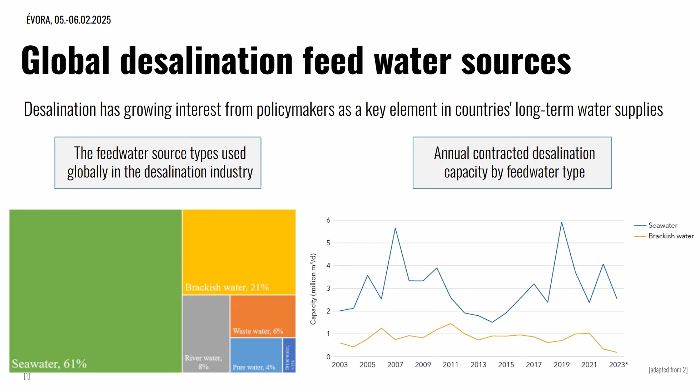So on the left side you have seawater, and for brackish water, you can see from 2003 until 2023 how the contracted capacity evolved regarding the feed water type. We can see that seawater is the mainly used feed for desalination.

I have a brief note that regarding Europe, 88.5% of the technology used nowadays is reverse osmosis. And as I said previously, MENA region countries—countries in North Africa and the Middle East—use mostly 31% multi-stage flash technology, and 9% multi-effect distillation technology.

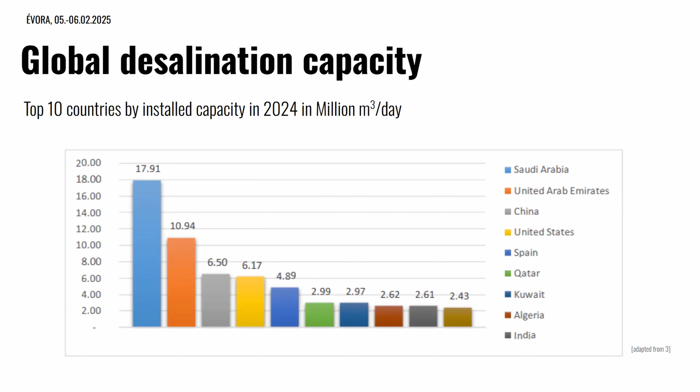It's important that there exist 2,336 desalination plants installed in Europe, but only 1,779 are active facilities nowadays, using seawater and brackish water. They can supply 7.92 million cubic meters per day.

And this is how the water produced by desalination is usually distributed - for most of them, it's public water supply, industrial applications, power plants, and irrigation.

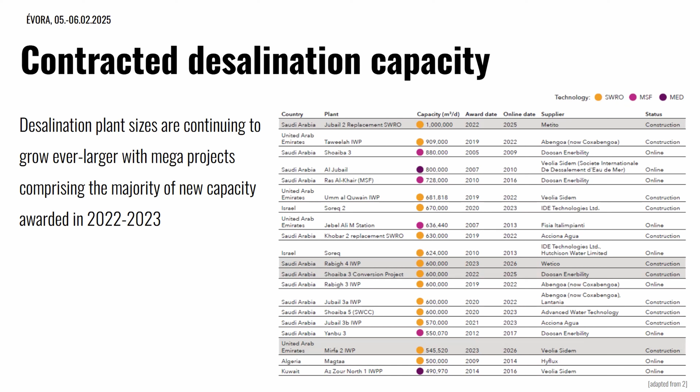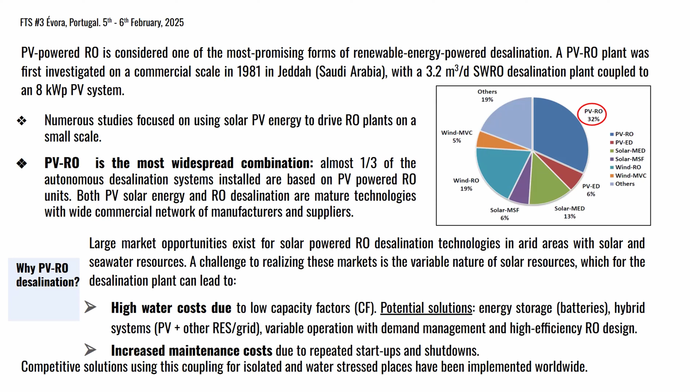Now we will see the KPIs. PV benchmarking refers mainly to the process of evaluating and comparing the performance, efficiency and effectiveness of PV desalination systems. This will involve assessing the key performance indicators, such as there are many, but the main ones are the water recovery rate, specific energy consumption, the CAPEX, OPEX, and the levelized cost of water, comparing them across different system designs, manufacturers, and operational conditions.

Which is the purpose, the main purpose of doing this benchmarking? Well, we can find just to identify the best performing technologies for different feed water scenarios and operation conditions. Also to optimize system designs for energy savings and cost reductions. Why not to compare performance across different climatic conditions around the world? And of course, to guide investment decisions in sustainable desalination projects.

The benchmarking approach we have done is mainly based on comparative analysis. The first way to do it is to compare different systems based on performance of these KPIs. And the second way we will see different charts is by comparing case studies of existing desalination systems.

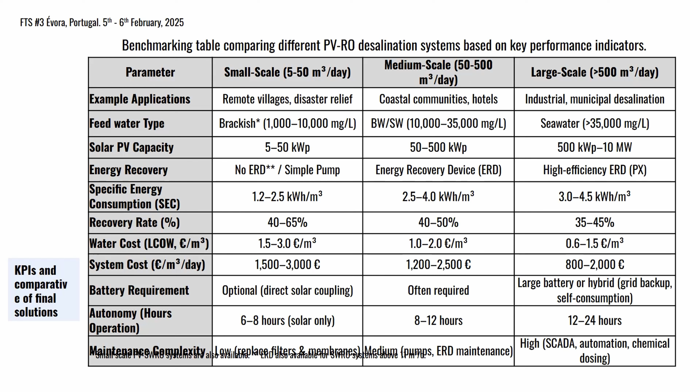And the maintenance complexity, we find low in the small capacity production plants, medium and high in the largest capacity. The second way of comparing different systems is by using existing case studies and comparing them.

We have here 4 different systems. The first one will be deeply explained by Tommy Laninsalo, he's the chief engineer of Solar-Water Solutions who will give us a talk later on. It's a small-scale off-grid system installed in Kenya, Kitui, with just 3 cubic meters per day production capacity.

The second one is a grid-connected system installed in Abu Dhabi. There's a curious system, floating PV RO in Singapore, and the large scale in Saudi Arabia, in Neom.

And the system type: the first case study is off-grid and modular design. The case in Abu Dhabi is a grid backup hybrid system. The one in Singapore is floating PV RO, and the large system is fixed in Saudi Arabia.

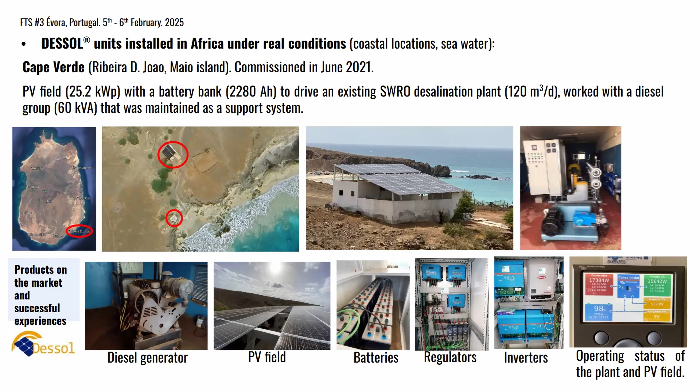This is a seawater reverse osmosis desalination system. What we did is install a PV field and a battery bank as a backup system to an existing seawater reverse osmosis desalination plant that at that moment was fed by a diesel generator, maintained in case of emergency. We just made a retrofit of the plant. It passed from 100 cubic meters per day of production capacity to 120 cubic meters per day.

Well, this is the first of the companies that will present today the system. I will not go in much detail because we'll have a later presentation on that. Just to say it's a company, Solar-Water Solutions, based in Finland. They have an innovative approach that enables the direct connection of solar without the need of batteries, inverters, and so on. Here we have the system we saw, the case study in Italy, in Kenya, and this is for brackish water desalination.

The second company is a French company called Osmosun. The technology could be installed fully off grid or connected to the grid. The production capacities go from the range of 1 cubic meter per day to 2,000 in the case of seawater desalination, and from 5 to 2,000 in the case of brackish water.

Here you have the successful experiences of this system. More than 40 Osmosun systems operating in 20 countries. You can find them in French Polynesia, Cape Verde, Mauritius, South Africa, Mozambique, Namibia, and Vanuatu. They are for both sea and brackish water desalination, with different production capacities, and beneficiaries of those systems.

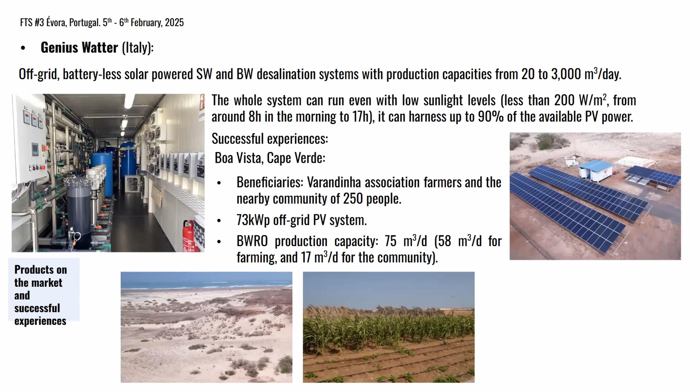The successful experience, just to highlight one of them, is the system they installed in Boa Vista, Cape Verde. It is a brackish water desalination system with 75 cubic meters per day of desalination capacity.

Now we are going to focus on the challenges and the future opportunities we can find for PVRO desalination. I have divided those challenges into 2 groups: the technical challenges and the economical challenges. I have highlighted 6 for each group.

The first one we find is the variable solar energy supply. The solar irradiance fluctuations lead to unstable power supply to the RO operation, and energy storage by batteries or hybrid systems are often necessary, but this adds complexity and cost to the system.

The second technical challenge will be the energy storage limitation. Of course, batteries increase the system's reliability, but have limited lifespans and require replacements. High cost, low energy efficiency, and degradation make battery integration a challenge within the system.

RO systems' efficiency and energy demand—of course, RO is an energy intensive process.

We need energy recovery devices in order to lower that specific energy consumption, and optimizing the energy use while ensuring consistent water production is the major challenging design.

The membrane fouling and maintenance during the operation of PVRO desalination systems can lead to shutdowns and startups of the plant more frequently than in normal operation, which can lead to frequent cleaning, increased operational downtime, and maintenance costs.

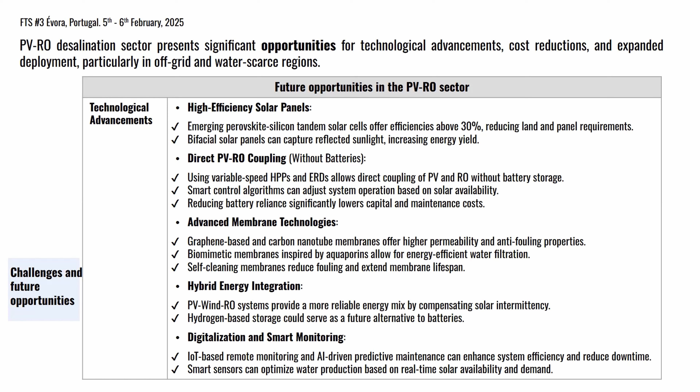More future opportunities, in this case, based on the economic and market expansion and the declining cost of PV and RO components. We find that solar PV module costs continue to decline, making PV more cost competitive. Mass production of high-pressure pumps and RO devices will further reduce system costs.

On the side of modular and decentralized systems, we find containerized PVRO solutions provide plug-and-play options for remote communities. The scalable microgrid integrated RO plants can serve both households and industries.

This is very important: green financing and carbon credits. Growing emphasis on decarbonization and net zero goals creates funding opportunities for PVRO projects. Carbon credits and water credits could provide additional revenue streams, and public-private partnerships can enhance affordability and accessibility for these kinds of systems.

And finally, the water-energy-food nexus. PVRO desalination for agriculture can support food production in arid regions. Solar-powered greenhouses using desalinated water can boost crop yields, and integrated aquaponics and desalination could be a sustainable food production model for many areas.

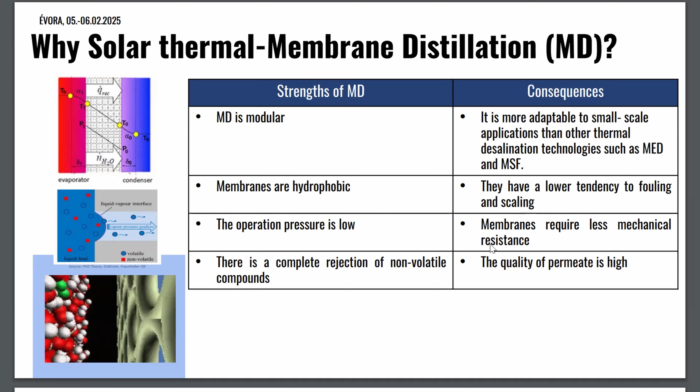All of these characteristics make it very attractive to some specific applications that I will explain later. Now I will move into the key performance indicators.

I'm going to focus on the energy efficiency at pilot scale and the evolution of this parameter throughout the years as membrane distillation became more attractive.

The first thing introduced in the design of membrane distillation technology to decrease the specific thermal energy consumption and improve energy efficiency was the shift from the plate and frame design to the spiral wound design, in order to introduce internal heat recovery in this technology.

However, when internal heat recovery was introduced with the spiral wound design, this value reduced to more acceptable values, that is 256 kilowatt-hours per cubic meter. So only the change of design from plate and frame to spiral wound, for internal heat recovery, decreased the specific thermal energy consumption by a high percentage.

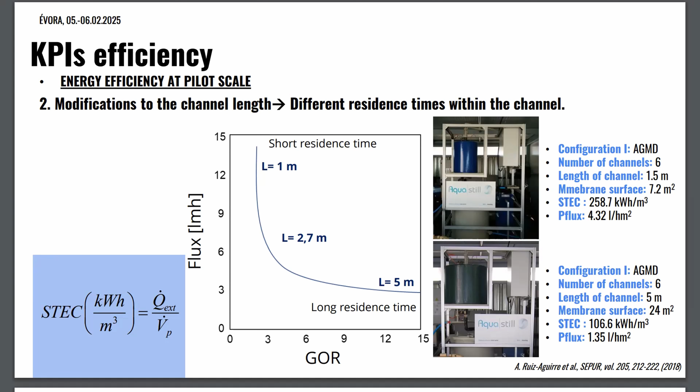Here we can see two different MD modules from the same company, Aquastill, that are totally the same, the only difference being the length of the channel: here 1.5 meters, and here 5 meters. We can see that the specific thermal energy consumption reduced by half in the case of the longest channel length.

The other modification in the design was to introduce the multi-envelope configuration in the channel. The difference is that each channel in the MD module, the permeate channel, the cooling channel, and the feed channel, is formed by several envelopes. This increases production inside the MD module as the number of envelopes increases.

The last improvement to increase energy efficiency in MD at pilot scale was the extraction of air and non-condensed gases in the permeate channel, the air gap channel. This reduced the resistance to mass transfer, for the same heat power. So when we introduce this configuration, the vacuum air gap membrane distillation, the specific thermal energy consumption was reduced.

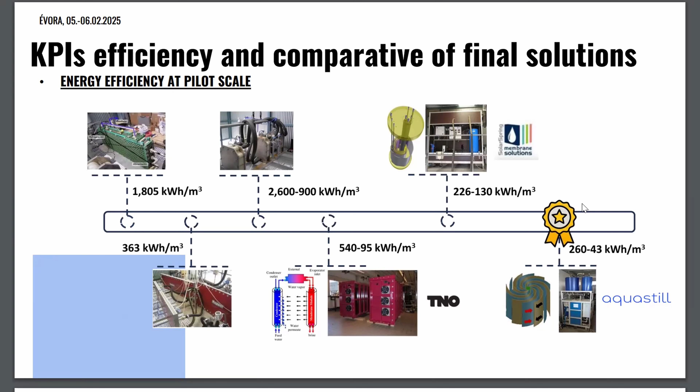This is the product currently on the market, from the Aquastill company, which incorporates different improvements to reduce the specific thermal energy consumption, with also a very acceptable production of permeate with high quality.

And now we move on to the successful experience in the field of membrane distillation systems, first of all at the Plataforma Solar de Almería.

We have already operated and characterized several different MD modules. We currently operate and characterize most of the MD modules existing in the market, and we operate at the Plataforma under an environment very relevant compared to the solar field.

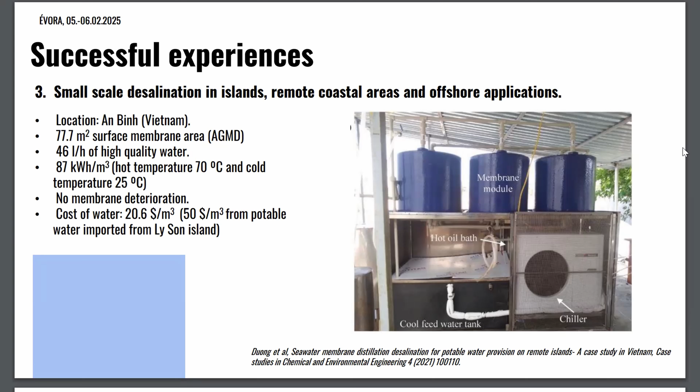Another successful experience, though not for producing high quality water, was the demo developed under the Reversen project. In this application, membrane distillation was coupled with reactive precipitation and diffusion dialysis to regenerate a copper electroplating bath. In the reactive precipitation, copper was obtained that is currently sold at half the cost of fresh raw copper material.

Now we move on to the challenges. I divided the challenges into three categories: energy efficiency, permeate production, and finally the quality of the permeate.

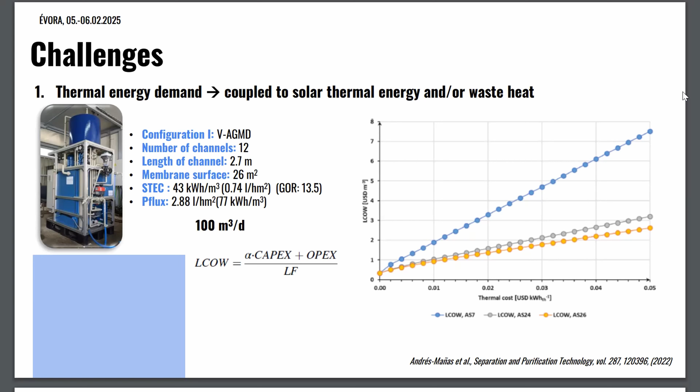Here I show an example of work where we calculated the levelized cost of water for a specific application producing fresh water, with a total production of 100 cubic meters per day. We obtained the levelized cost of water depending on the thermal energy cost. The orange line relates to this model, and we can see that if we increase the thermal energy cost, the levelized cost of water increases. Considering a solar thermal energy cost of 0.036 euro per kilowatt-hour and an electric energy cost of 0.07 euro per kilowatt-hour, the levelized cost of water was 1.79 euro per cubic meter, which is acceptable considering a production of 100 cubic meters per day in a small scale application.

Now, considering the challenge of increasing the permeate production, we can consider two different approaches. One is the use of the multi-envelope design I already discussed previously, which produces higher permeate considering the multi-envelope internal design of the module. The other approach is to use another configuration, the vacuum multi-effect installation, which consists of using several effects in the module to recover the latent heat of condensation from the previous step.

To be honest, this configuration reduces the specific thermal energy consumption, but not as much as in the case of the Aquastill installation. But the most important advantage of this configuration is that the recovery ratio is very, very high. Considering the usual recovery ratio of 10% for this technology in a single pass, we obtain recovery ratios higher than 50%, whereas usually the recovery ratio obtained with this technology is below 10%.

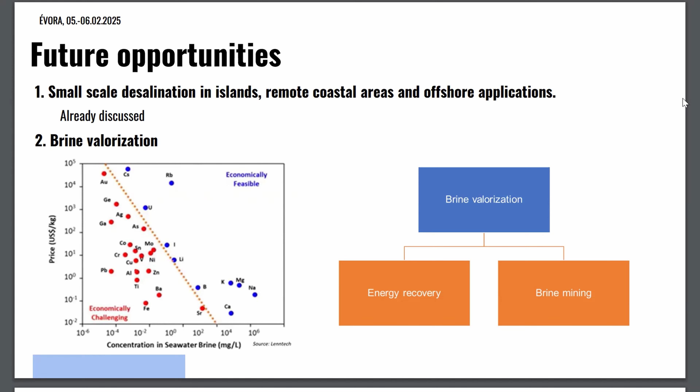Later I'm going to explain two different projects. One focused on brine mining, but the other focused on the production of energy from the brine.

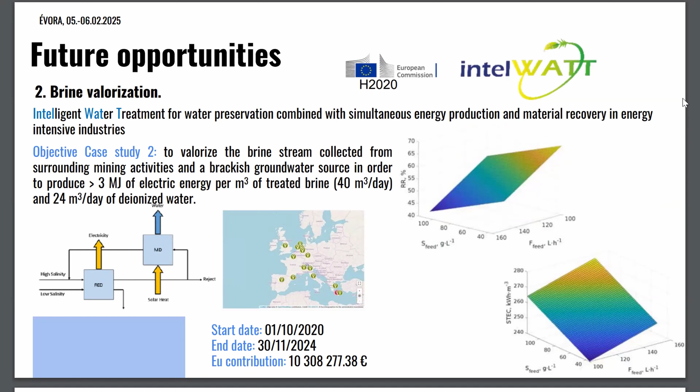Here we can see the European project intelWATT, focused on the production of energy. The membrane distillation was coupled with reverse electrodialysis in order to regenerate the high salinity stream with membrane distillation, to reuse it in the reverse electrodialysis considering the salinity gradient in order to produce electricity. Here we can see the results obtained with the high salinity, and we obtain a high recovery ratio with this module, and the specific thermal energy consumption is between 260 and 270 kilowatt-hours per cubic meter.

And finally, the last application for membrane distillation is to produce high quality water for green hydrogen production. In green hydrogen production, the technology considered is electrolysis. The water is split by electrolysis, and this process consumes a high amount of fresh water, not only for production but also for cooling, because the efficiency of the electrolysis is not 100%, it's between 60 and 70%, which means part of the electricity is transferred into heat, and it's necessary to cool down the water to continue the electrolysis process.

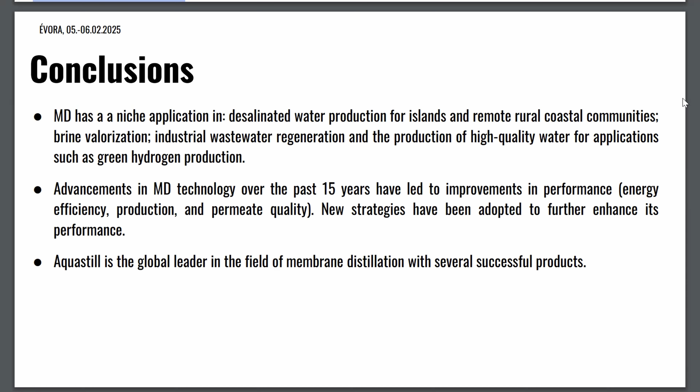Thank you for the presentation. And you mentioned the problem of salt passage with thick brines, right? Yes. But I'm not so concerned about it in the case of circular economy lines, because I think you can recirculate it back into the feed of the RO system. So can you give us an idea of the salinity you can get in the permeate stream, the condensate stream, when you treat brines?

Yes, depending on the salinity of the feed. But when we increase the salinity of the feed higher than 70 grams per liter, the conductivity of the permeate can be between 100 and 300 microsiemens per centimeter. Yes, but considering MD, in general you can produce a very high quality permeate, because for seawater the conductivity is 1 or 2 microsiemens per centimeter, which is very low. Yes, yes.

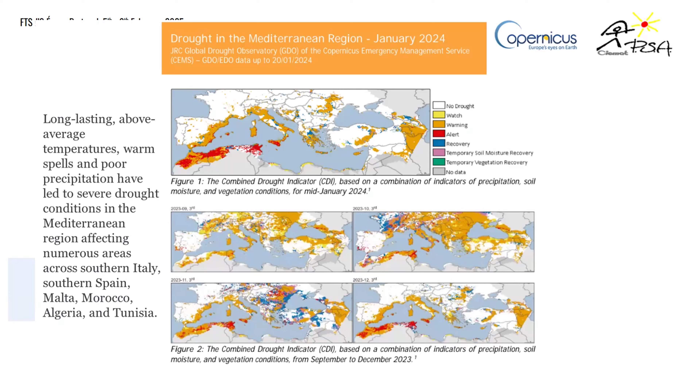I'm not going to be long on this, but I would like to put you in context: we are in a severe drought in the south of Europe, in the Mediterranean countries, so we all know we need alternative sources of water. Water reuse is already accepted as another alternative water resource, always in combination with desalinated water. So we need to think about the effluent of municipal wastewater treatment plants as a resource more than as a waste, and of course there are many benefits to reusing urban wastewater after proper treatment.

There are benefits from environmental, social, and economic point of view, but I always insist that it must always be in combination with desalinated water, because we don't have enough for all the activities with treated urban wastewater. So we have several challenges for reusing the urban wastewater, and in other presentations I already explained a lot about this, but I'm not going to go deeper.

We have water microbial contamination, mainly pathogens, but even more important nowadays are the antibiotic-resistant bacteria and genes. We have also chemical contamination coming from what we normally call contaminants of emerging concern, but now microcontaminants, and also more important now are microplastics, and mobile and persistent contaminants like PFAS, PFOS.

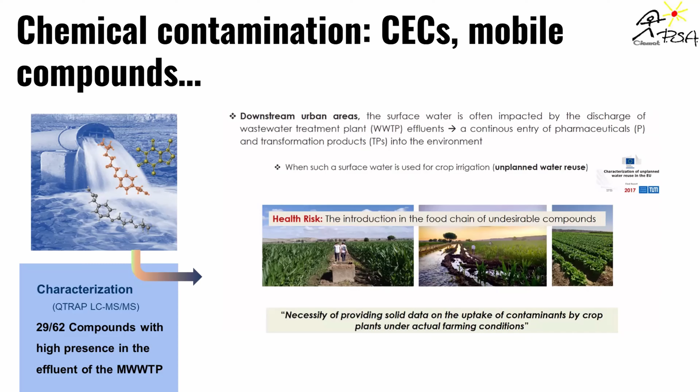So solar advanced oxidation processes, or advanced oxidation processes, have been widely studied and even widely applied for the elimination of these contaminants, not only microcontaminants, but also successfully applied for industrial wastewater treatment. These are some of them.

These processes are independent of temperature and pressure, so you can use them at ambient pressure and ambient temperature. And the good thing is that you can drive them by solar energy. Basically you generate hydroxyl radicals or other radicals that are powerful enough to eliminate contaminants and microorganisms. So here I leave you some examples that can be powered with solar energy, which is of high interest also in the case of countries with severe water scarcity.

Heterogeneous photocatalysis is the AOP where we use semiconductors, we use catalysts, and thanks to the photons of the solar energy - not the thermal part but the photons - we produce hydroxyl radicals. You can see some characteristics and also some advantages here.

We also have homogeneous photocatalysis by solar photo-Fenton. In this case, everything is soluble in the water. You have iron and peroxide, and you use solar energy to close the cycle in the iron, so you produce hydroxyl radicals again. The problem with the photo-Fenton process is that it's pH dependent, but it is highly adapted to every process. Normally solar photo-Fenton is more efficient than titanium dioxide, of course, even more so if we are speaking about industrial wastewater.

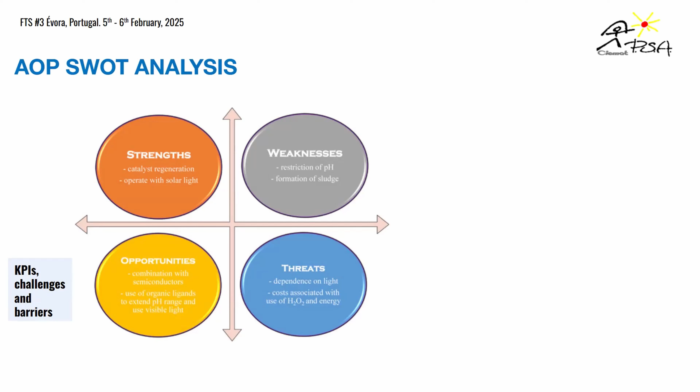Even more if you have industrial wastewater, we have several opportunities because we can try to produce new semiconductors, and use ligands to be able to work at neutral pH. Of course, we have the dependence on the light. Normally for this kind of advanced oxidation process, the higher costs are in reagents, but not so much the energy if you use solar energy.

If we go through the SWOT analysis for heterogeneous photocatalysis specifically, which is what we are more focused on in this project, we have favorable conditions and properties of the catalyst, simultaneous disinfection, and at the same time we eliminate contaminants. But we have some weaknesses because normally titanium dioxide and other semiconductors are only active under the UV part of the solar energy, but not the visible part.

So there are a lot of new studies trying to improve their activation under visible light. The good thing is that we can now design new photoreactors, thinking of immobilizing the photocatalysts on different supports, and of course we can always use LED technology instead of solar energy. We can reuse the catalyst, but if you don't support the catalyst in an immobilized system, that requires extra steps and extra costs.

So which are the challenges and barriers for AOP implementation and penetration to the market? Why? Because we cannot say that we are in the market yet. There are not big companies producing AOP systems. Why? Because normally, even more the solar systems, AOP systems are more used for specific industrial wastewater or for decentralized systems. So we have a lot of small companies working on that and giving solutions, so you can obtain it in the market, but it is not broad spread in the market.

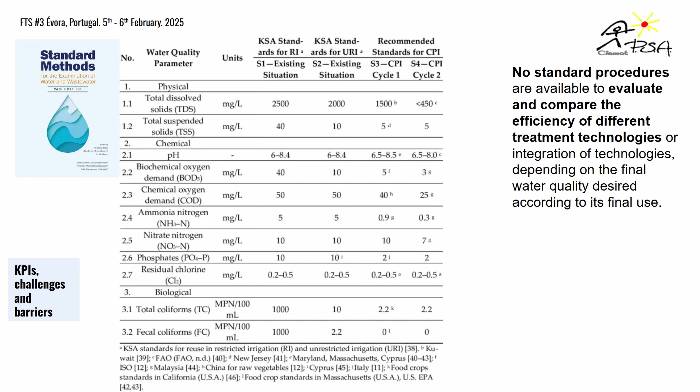Well, I leave you this here. I'm not going in deep because it's only how to compare. These are the guidelines I was telling you about.

We don't have standards, but there are some publications that give us guidelines to compare new AOPs or new technologies with the state of the art and with benchmarking technologies. Of course, they always depend on the wastewater, the contaminants you are going to target, and the scale you are going to be able to apply your new technology. You also have to define properly what the final application is and which benchmark you are going to compare with.

Of course, you always have to use real wastewater to optimize your new technology and to compare with the state of the art. And you always have to compare energy and cost efficiency, because that's quite important.

Even when you scale up and use solar energy, you need to design new photoreactors, and that's also quite costly in investment if you don't decide properly which reactor you are going to use. That can increase the costs a lot.

And of course, it's always a decision diagram at the end: if the new AOP doesn't exceed the benchmark, then it's better to change it and try to modify it. Since it's not well established in the market—well, a few technologies are, but not AOP—I'm going to show you some successful experiences, focused on the TRL. Where are we?

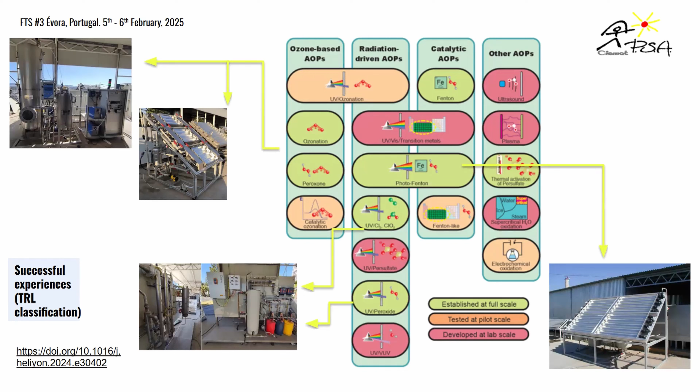Here is only a picture of the CPC, but you also have to take into account which kind of wastewater you are going to treat, always, because otherwise you're going to have high implementation or installation costs. So if we focus on the TRL, we are going to focus from 4 to 7.

At TRL 4 it's lab testing and validation—the design, development, and lab testing of components and new AOPs. We have already tested, between TRL 5 and 6, the treatment of industrial wastewater. This is an example on landfill leachate.

Here, as I told you, we are integrating or combining different technologies because our aim is to reduce costs due to the AOP, and we only use AOP when it is highly necessary. So for that, we have to prepare the industrial wastewater with coagulation, flocculation, a physical-chemical pretreatment. You eliminate solids and color.

Then you can apply a solar AOP because you have a more or less transparent or less colored industrial wastewater. So you reduce the consumption of oxidants, you reduce the cost, and as soon as you attain a high biodegradability, you can combine it with a biological treatment.

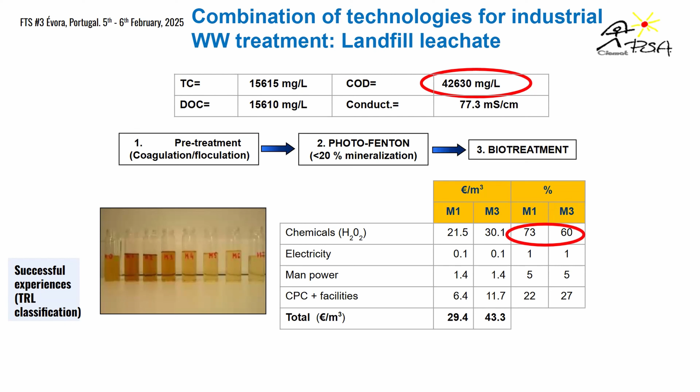This is what we have been doing, and we already have costs for that. Of course, these costs are for industrial wastewater treatment, so they are not cheap.

If we move to the treatment or elimination of microcontaminants and microorganisms at the outlet of a municipal wastewater treatment plant, the water is clean and you don't need the integration of those treatments.

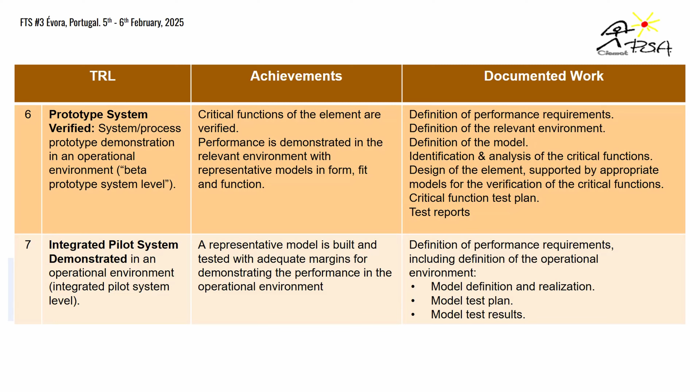Moving to higher TRL, 6 and 7, we reach prototype demonstration and demo site validation in a real scale environment. We have been treating the effluent of a municipal wastewater treatment plant, comparing solar hydrogen peroxide with solar photo-Fenton, which is an AOP, while solar hydrogen peroxide is a photochemical system but not an AOP. We irrigated lettuce and radish and checked what happened with contaminants and pathogens in a real scale greenhouse.

We also have examples of demo scale photoreactors, in this case for eliminating contaminants coming from the washing of pesticide containers, for reusing the water. This shows the construction of the treatment field, about 150 square meters with different modules of CPC. In this case we also validated solar photo-Fenton.

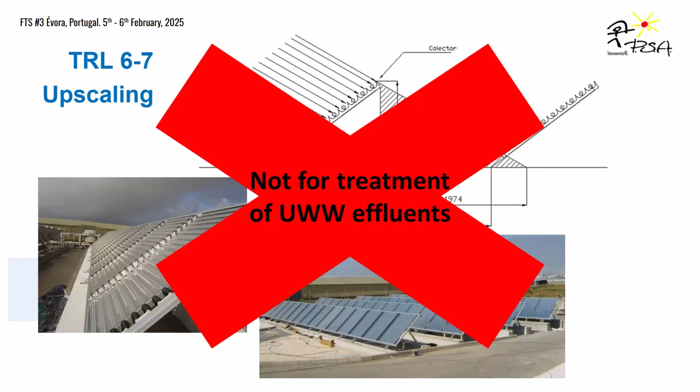In terms of upscaling, what we've learned from demo sites is that it's worthwhile economically when dealing with industrial wastewater, as mentioned before. But when dealing with urban wastewater, which is much cleaner, you can use cheaper photoreactors.

Future opportunities, or even nowadays opportunities, are focused on the fact that we need to treat all urban wastewater for reuse in crop irrigation, since 90% of water consumed is used for irrigation. Also, reducing industrial water footprint is quite important nowadays. So we have opportunities to lower the costs of photoreactors, depending on the application we're going to tackle.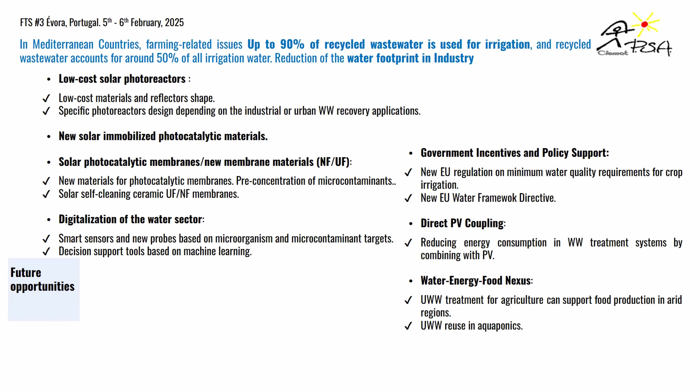We are also investigating new photocatalytic membranes for doing both nanofiltration or ultrafiltration and treatment at the same time. Of course, digitalization of the water sector is quite important, and we are collaborating with people developing decision support tools based on machine learning systems. Government incentives now include new regulations, the new Water Framework Directive. We are also focusing on coupling with PV to try to reduce energy costs, though our energy costs are already quite low. And of course, we are always focused on the water-energy-food nexus for food production and reuse of urban wastewater in aquaponics, which is quite relevant nowadays.

So I think I'm concluding now. Just a few conclusions to remind you: solar AOPs based on photocatalysis have their market niche in decentralized systems, normally in isolated areas, or for specific industrial wastewater treatment.

You need to always validate new AOPs and new technologies with actual real wastewater, under real operating conditions. The longevity of these new treatment materials has not been tested yet; we need longer time, and it depends on the water matrix. For me, what's highly important is integrating wastewater reuse into circular models, and circular economy is quite important. It's being done nowadays, and for that, health risk assessment and life cycle assessment must also be included.

Just to finish, sustainable aspects should always be taken into account, along with the water positive initiative and the social aspect. So that's all from myself. Thank you very much.

I don't know, maybe some curiosity, I know it's not your topic at all. You mentioned the possibility of removing microcontaminants through nanofiltration concentration. What about PFAS? Which ones, the normal kind of contaminant that's very focused on? I don't know which contaminant that is. PFAS, yeah, I told you.

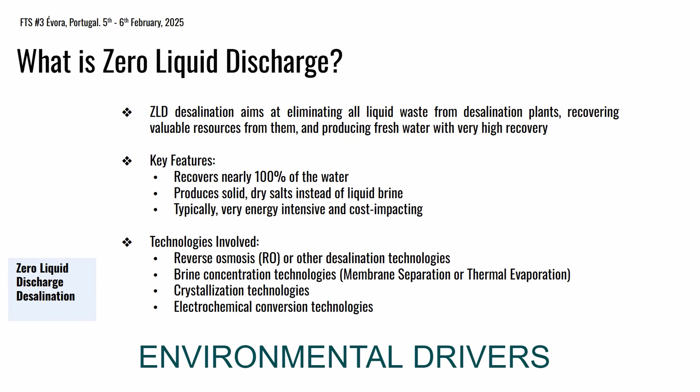But there is a difference between zero liquid discharge and brine mining, which is maybe closer to the concept of minimum liquid discharge. In this second case, the aim is to recover valuable resources from brines, but limiting the focus to what is economically viable to recover. Key features: you recover only the compounds valuable for internal use within the same plant or valuable for the market, producing solids or specific salts, concentrated solutions that have marketable value. But you still require a brine discharge mitigation strategy; you do not eliminate the brine disposal problem entirely, you need to face it in some different way.

The technologies are very similar to what you have in zero liquid discharge: brine concentration separation technologies, other types of separation technologies such as liquid gas contactors in some cases, crystallization, and electrochemical conversion. But what makes the big difference between ZLD and MLD is that in MLD, or brine mining, you have two drivers: one is environmental, the second is economic, and the economic one may weigh more than the environmental.

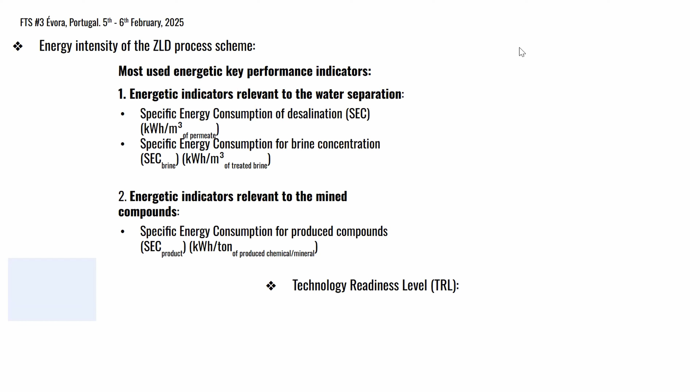So, energy intensity of the ZLD or brine mining process. We can define two different types of indicators. Energy indicators relevant to water separation: typically we have a specific energy consumption for the desalination phase, or a specific energy consumption for the brine concentration phase. But we can also identify energy indicators relevant to the mined compounds.

In this case, it's not only that we want to produce water, we also want to extract a compound, solid or in solution. In this case, we can define a specific energy consumption for the produced compounds, defined as kilowatt-hour per, for example, ton or kilogram of the compound.

And then we have the concept of technology readiness level, which is very well known to all of you. So TRL depends, and let's say the benchmarking can depend on the capacity of the largest operating pilot plant, demonstrated operational time of the pilot plant, and number of implementations.

The other two classes are overall recovery and circularity potential of the integrated approach. We have several key performance indicators, but these are the most used: resource efficiency, how much compounds you have recovered compared to the same compounds arriving with the incoming brine; and circular chemical inflow, which tells you the kilogram of recovered species that are reused within the process itself, divided by the total chemicals that are used in the process.

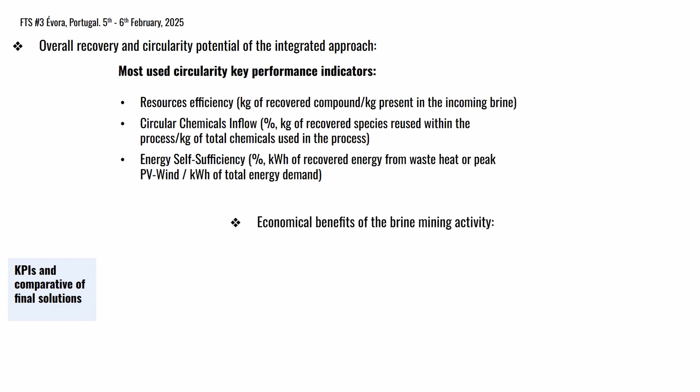And finally, economical benefits of the brine mining. So we need to know the CAPEX, OPEX, but we can define specific parameters like levelized cost of the treated brine, or levelized cost of the produced chemical.

Now, as I said, this will not be a benchmarking of zero liquid discharge technology, but we can say that in order to implement zero liquid discharge, we need to have brine concentration technologies and, let's say, solid separation technologies. So we will make a quick comparison of brine concentration processes, which are listed and classified into membrane-based and non-membrane-based. And there is a long list.

You may remember this list was already discussed during the first fast track school. So I will just fly through that and the following slides, because apart from a couple of you, the others have already attended, but you can find in the slides, and also in an annex with backup slides, all the information that you would like to have.

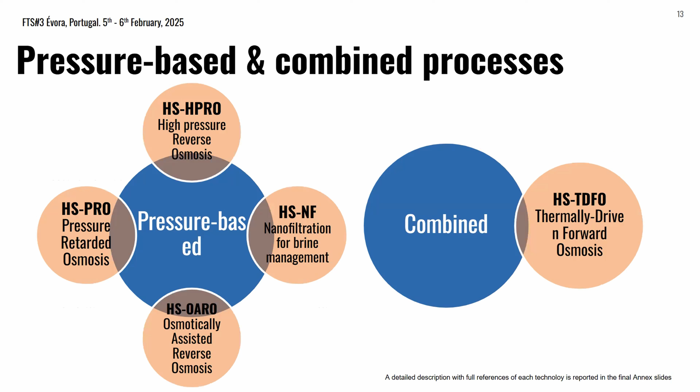So we classify these brine concentration processes, and we start with the pressure-based or combined processes like high-pressure reverse osmosis, pressure retarded osmosis, nanofiltration for brine management, OARO, and so on.

This is because it also depends on the technology and on the type of brine treatment. These values refer to different types of brines being concentrated—lower values for lower concentrations, highest values for highest concentration. If you want to concentrate a brine above the threshold of, say, 100 grams per liter, the energy consumption will be 10 times higher than typical energy consumption of brackish water or even seawater desalination.

When you go from pressure-driven to thermal-driven processes, as Alba has already shown, you change by at least one order of magnitude, and in some cases, depending on the technology, by two orders of magnitude in energy consumption. But this is thermal energy consumption, which is cheaper than electricity and can be recovered from waste heat or solar thermal.

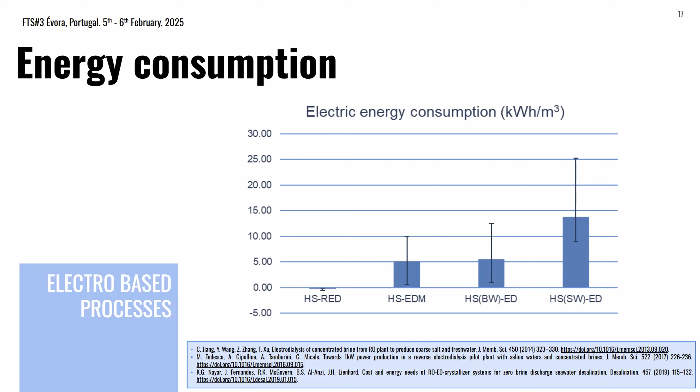Of course, in reverse electrodialysis, as well as in the pressure retarded osmosis in the previous graph, you have a negative energy consumption because these are technologies producing electricity from saline gradients. TRL 6, 7, not very different from the previous case. Thermal-based processes have relatively low electrical energy consumption, but typically very high thermal energy consumption.

Same for crystallizers. You can have a huge number of crystallizer configurations and operating conditions, from the conventional ones to the most innovative ones. In the Fast Track School 1 and 2, we already analyzed and discussed two types of crystallizers: the multiple feed plug flow reactor, used for magnesium recovery, and evaporating solar ponds.

These evaporating solar ponds have been used in zero liquid discharge schemes for recovering sodium chloride. Just flying over different possibilities of conventional crystallizers: PFRs, semi-batch, double feed semi-batch, and continuous crystallizers.

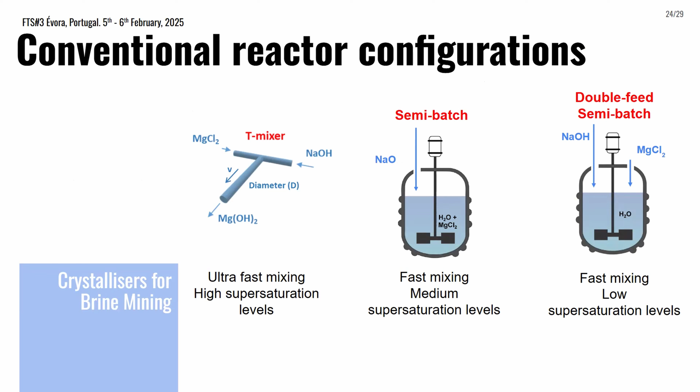This is what we've seen about the multiple feed plug flow reactor, which is a technology patented by ResourSEAs. Fabrizio may give a presentation later focused on that, which has been applied in a number of research projects, reaching a quite good TRL level of between 6 and 7, with different types of applications.

Also about evaporative ponds, we discussed this a bit. Basically, if you want to get good product quality, you have to make fractionated crystallization, which means you evaporate and concentrate the brine under multiple following steps until you reach saturation, first of all, in calcium ions—typically calcium salts—and then sodium chloride, which is your final component.

You need to know the crystallization kinetics very well in order to properly design the system, but this can be done, and it was demonstrated—Lorenzo presented something in the last track school. You can demonstrate that you can produce very high quality sodium chloride in a very simple way.

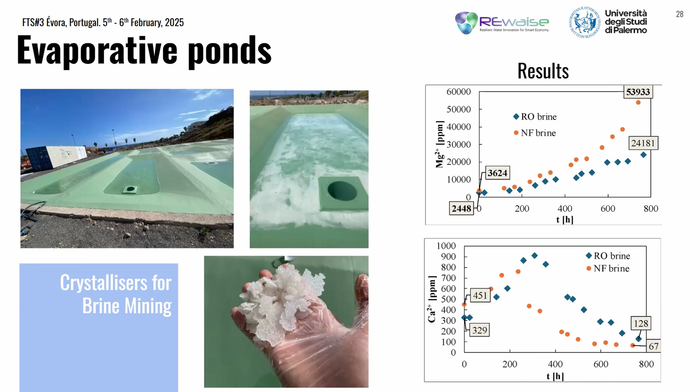Now I'll go through a couple of examples of implementation. The water mining project—I mentioned it in the last track school. What I want to show you is what's presented in this recently published paper.

It's an analysis showing performance indicators and circularity indicators of this integrated process, which is basically a full zero liquid discharge example. How does it work? We start with seawater; nanofiltration separates a retentate stream which is rich in bivalent cations and anions.

The MFPFR reactor separates magnesium and calcium in the form of hydroxide ions. The effluent, which is calcium and magnesium free, can be treated in an electrochemical device for the conversion of salt into sodium hydroxide and hydrochloric acid. Sodium hydroxide is fully reused within the process itself.

The remaining brine can be further treated in the MED plant. The permeate from the nanofiltration, which contains mostly monovalent ions, can be treated in a multiple effect distillation unit, producing high quality drinking water and being almost fully powered by waste heat. The net brine, which is very concentrated, above 200 grams per liter, can fill the evaporative ponds where sodium chloride is produced. These are the pictures of all the units, nanofiltration inside a container.

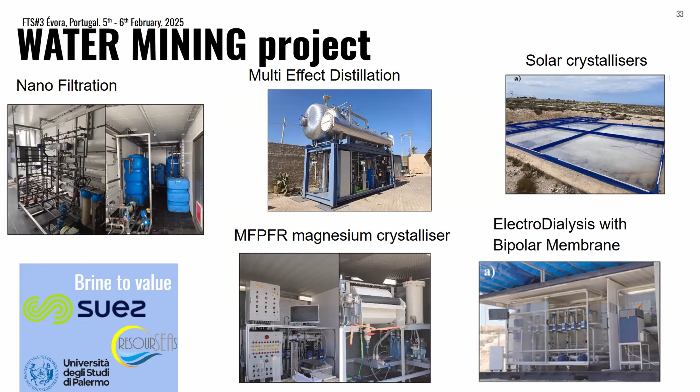This is the MED unit. These are the solar crystallizers with the salt precipitated at the bottom, the MFPFR, and the EDBM units. So all these pilot units were implemented, they were operated, data was collected, and this is a summary of the results.

Purity of solids produced: high purity obtained for magnesium hydroxide, you see it changes between 90% to 98%. We reached even higher values. The difference depends on a very specific factor, which is the presence of a pre-treatment of the brine, which I will show you in the next example.

Calcium hydroxide purity is lower because of the co-precipitation of magnesium, but that's not a big issue, as I will explain. Sodium chloride has very high purity, much better than food grade sodium chloride. Recovery of products is up to almost 100% for magnesium, between 70 and 80% for calcium, above 95% for sodium chloride.

Some of it is lost with the mixed salt at the end of the chain. We see 70 to 85% recovery of water, so very high recovery of water. But we also produce some chemicals, in particular sodium hydroxide and hydrochloric acid solutions with a concentration between 0.5 and 1 molar.

Circularity indicators: resource efficiency, circular chemical inflow, energy self-sufficiency, we have defined them before, and this table summarizes which values were achieved. There is another one, the total brine reduction, 93% reduction in brine volume. Resource efficiency for water, 80% water recovery.

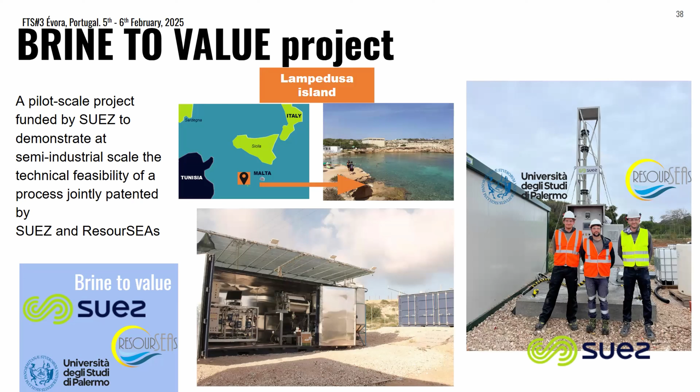That is a second example of the project. I finished my 20 minutes, but I will go fast through the conclusions. The Brine to Value project is somehow a continuation of the Water Mining project, but we wanted to demonstrate that with similar units, cutting what is most energy expensive and cost intensive, we can still achieve a nice integration of processes for brine mining.

The objective in this case is not zero liquid discharge, but brine mining for internal use. This is the process scheme: you have your brine, you take a portion of it, and there's a first step for CO2 removal. Why CO2 removal? Because the final goal is to obtain from this process what you need for remineralization, so CO2 is needed for that. But the second reason is that if you remove CO2, you get better quality in the reactive crystallizer because you avoid the precipitation of calcium carbonate with magnesium hydroxide.

Reactive crystallizer for separation of magnesium hydroxide. A second reactive crystallizer, where you have a final crystallization of a mix of calcium and magnesium, again useful for remineralization. Finally, you have EDBM closing the loop and producing what you need: chemicals for acidification before CO2 removal and alkaline reactants for the crystallizer.

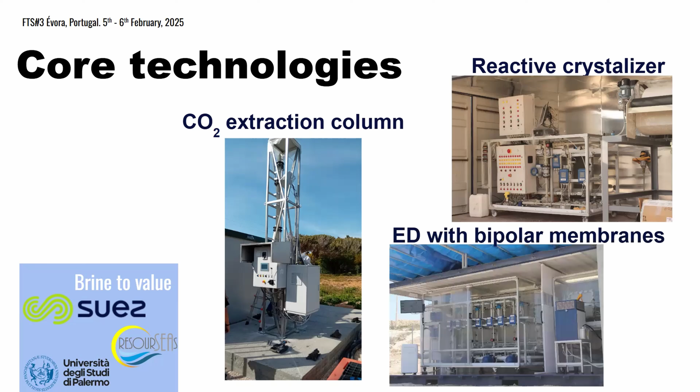The process has been implemented at full pilot scale, semi-industrial scale to be honest, and the units are all operated now. I'll show you some results only from the MFPFR crystallizer, just to highlight how the purity of magnesium hydroxide dramatically changes, passing from the standard configuration with no CO2 removal, around 93 to 95%, to a purity above 98% when you remove CO2.

Challenges about zero liquid discharge: very large energy consumption for brine concentration. The answer is to adopt natural solar evaporation where possible, develop more efficient membrane concentration systems—we are waiting for that—or separate minerals from brine directly without concentrating the brine.

But this gives us a different answer: we are not going to zero liquid discharge, but to brine mining. Purity of solid products does not meet the market targets, so you have to implement fractionated crystallization schemes, adopt selective reactive crystallization, or use membrane-based pretreatments for ion separation. Finally, there's the large footprint requirement for solar evaporation ponds. How can we bypass it? Implement a pre-concentration stage, adopt technologies achieving higher evaporation rates, or renounce zero liquid discharge and go for just brine mining.

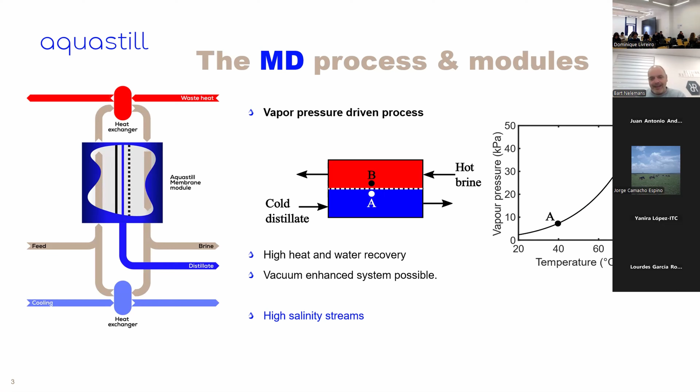The membrane in this case is hydrophobic, meaning liquids don't go through it, but vapor and gas can. There are different membrane configurations. The most simple one is direct contact MD, using two channels—a hot one and a cold one—with the membrane in between. This is the most commonly used in university settings because it's a simple setup, but it's not always the best because you face issues with heat and mass transfer.

To diminish heat losses over the membrane, there's another configuration: air gap membrane distillation, where you add not only the membrane but also an air gap where you collect vapor that condenses against a condenser. This makes it easier to produce clean water, and gives better mass transfer with less heat loss to the other side.

Over the years we evolved further: when we lower the pressure in the air gap and the membrane, it increases mass transfer, giving higher flux and more distillate production, while also being a better insulator, so energy performance improves. These are the three main MD configurations we've worked on in the past.

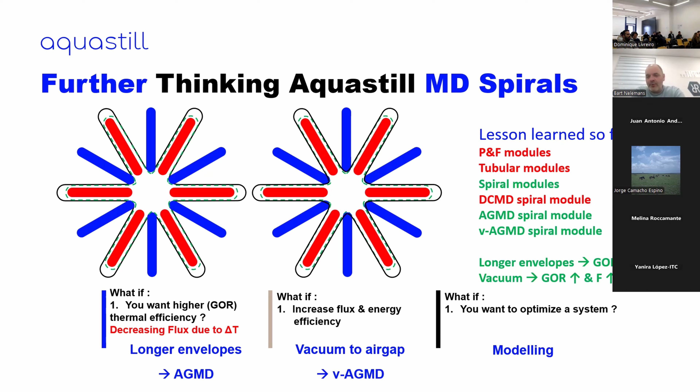But we are still looking for other options to optimize our systems. The thing is, when you add a vacuum, you're also adding a risk, because you have bigger hydraulic pressure differences over the membrane, but also in and outside of the module.

When you really want to optimize, and we did that also in the past but we're still working on it, it's modeling, it's simulation. Making a model describing your heat transfer inside channels, describing the mass transfer inside membranes, and also the mass and heat transfer inside air gap channel systems.

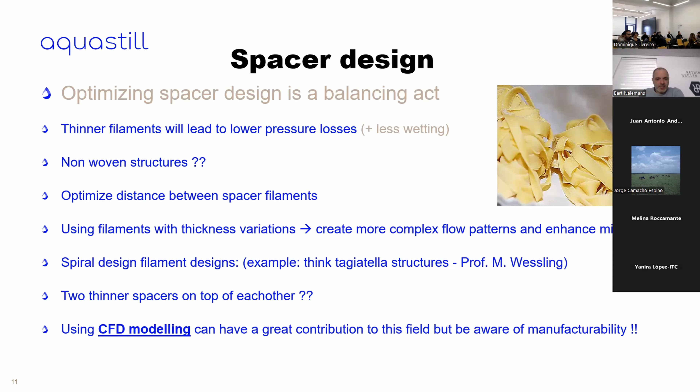Another thing I didn't mention about membrane distillation - we now looked at flux and thermal heat consumption and also electrical consumption, which we call the quantitative aspects - but you also have quality aspects in MD, because you can have leakage through a membrane, and there are several kinds of leakages possible. It can be pinholes, it can be the wetting of the membrane in this case.

You can have a surfactant in your fluids, for instance, so you can prevent that going in. You can increase the hydrophobicity of your membrane itself, so it's more resistant against wetting. You can decrease pore sizes, you can decrease the pore size distribution, for instance. You can lower your operation temperature, but that's an issue because you want high temperatures in your modules because that's your driving force.

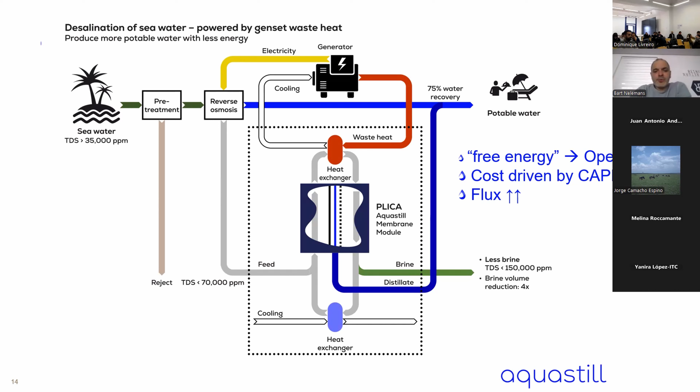So this is one of the applications where we can say, okay, we have heat from the genset, and we can take quite a lot for that. So we can reduce the envelope length, and we can go for a bit higher fluxes and a bit lower GOR values.

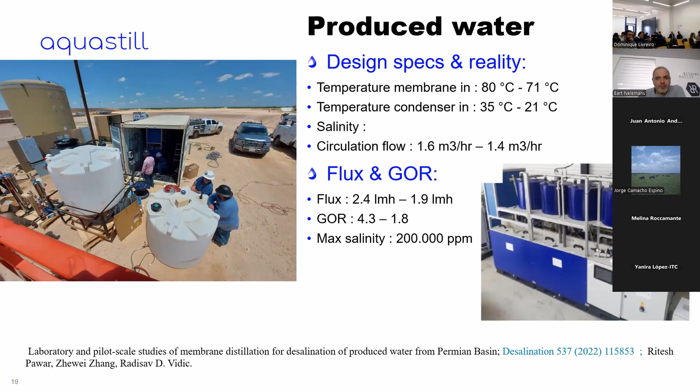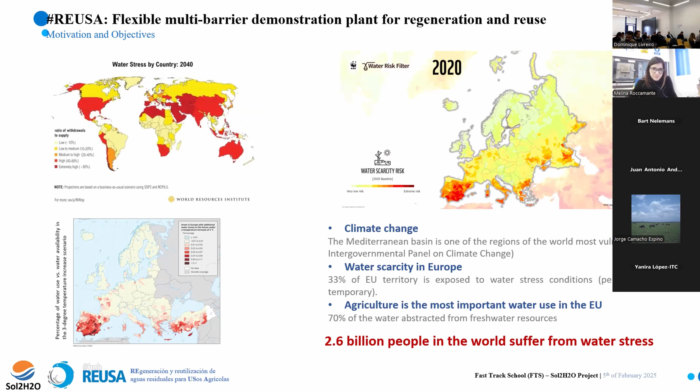The main objective of the REUSA platform is to demonstrate the use of a novel, modular, and flexible solution to produce reclaimed water for agricultural irrigation. The combination of these technologies will produce a high-quality effluent that can meet the new European regulation while addressing other contaminants, such as contaminants of emerging concern and microplastics. It also seeks to reduce the operating cost of tertiary treatment and minimize risk to the environment and human health.

In this case, 3 microbiological indicators are specified for this validation: E. coli, total coliphages, and Clostridium perfringens spores. All new technologies must be validated before implementation.

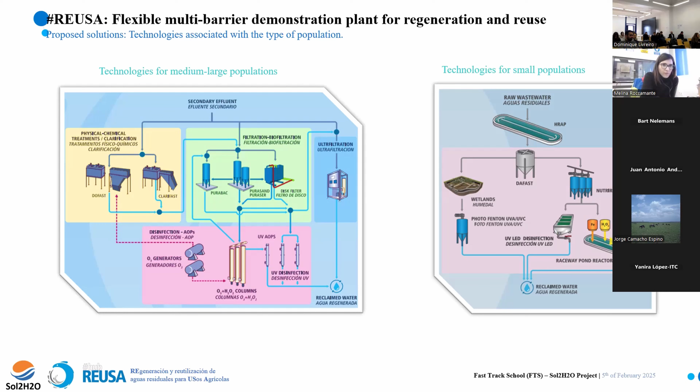Now I will talk about the technologies associated with large and medium populations. It is possible to divide them into 3 treatment units: physicochemical treatment, filtration/biofiltration treatment, and oxidation/disinfection treatment.

We start with physicochemical treatments. In this case, we have 2 technologies: Clarifast and DAFast. First, Clarifast is a compact system that combines ballasted flocculation and lamellar decantation. The system allows flexible operation with variation in flow from 20 to 50 cubic meters per hour and effluent load.

In this system, sand is added to improve flocculation. This increases hydraulic velocity and reduces retention time. The process consists of 3 phases: adsorption, coagulation/flocculation, and decantation.

In the first step, powder activated carbon is added to remove dissolved organic matter. Then, in the coagulation chamber, polychloride is added, which leads to the formation of colloids from the dissolved matter. After that, water enters the flocculation step, where the polyelectrolyte is added.

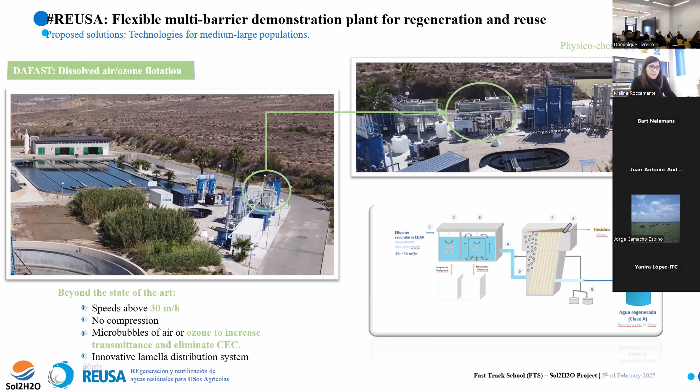This technology is designed for a treatment capacity of 10 to 12 cubic meters per hour. Some advantages of this technology are 90% less water rejection, 90% less air use, 50% increased solid retention, and improved turbidity. It should be noted that the innovative washing system of this technology has recently been patented by Aqualia.

Puravac is a continuous wash filter using biologically activated carbon as filter media. This equipment is used in combination with ozone.

The water is first ozonized and then enters the equipment. Ozonation usually results in the formation of products that are more degradable than the original compounds, which increases the efficiency of the bio filters.

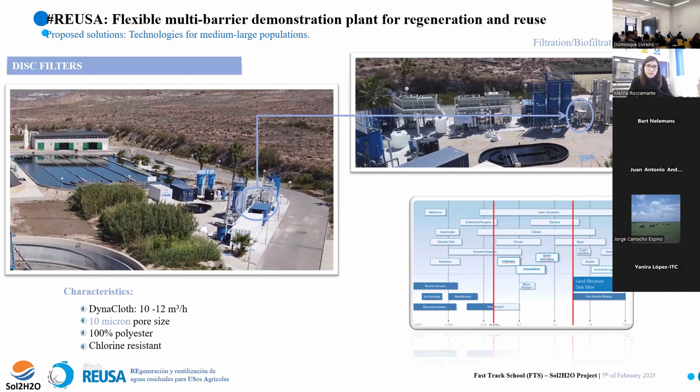We know that in many cases, salinity is a barrier to reuse. For that reason, in the reuse platform, we have different filtration systems such as ultrafiltration, reverse electrodialysis, and nanofiltration.

Let us now turn to the oxidation disinfection treatment. We have chosen two ozone generators of 200 grams per hour, working at high ozone concentration, fed by oxygen generated on site and cooled by a chiller, giving the same performance as an industrial plant.

Two different application points with ozone are used to achieve the target for each water treatment line. The first is to improve flotation, compared with the use of air, and the second uses ozone with a contact tower for tertiary treatment of the effluent.

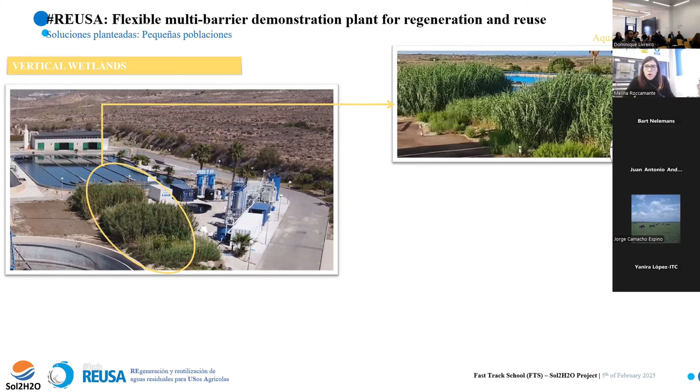In terms of wetlands, we have 4 wetlands consisting of phosphorus absorption filters that are stable for more than a year and provide us with adequate release of phosphorus into the soil as fertilizers.

Each wetland covers an area of 50 square meters. This technology allows us to achieve complete nitrification, turbidity reduction, total suspended solid reduction of over 90%, and pathogen reduction of 2.5 log.

The CIESOL Research Center, a partner in the Life Phoenix project, has two types of technologies based on photo-Fenton. On one hand, they have a pilot plant with a raceway to carry out the solar photo-Fenton process in continuous mode.

And on the other hand, they present a laboratory scale pilot plant in which they carry out the photo-Fenton process with UVC and UVA LED radiation. The performance of the wetland has been tested in this plant.

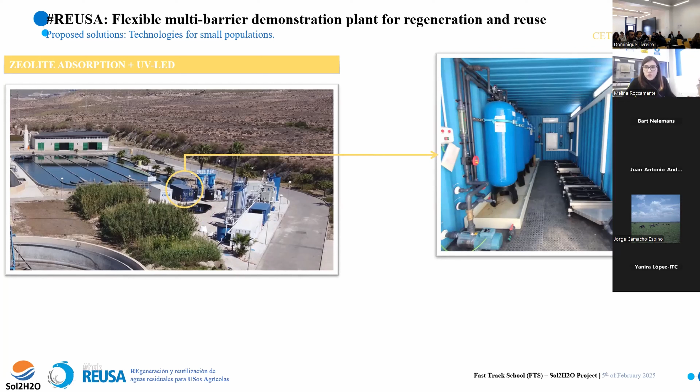The CETIM Research Center, also a partner in the Life Phoenix project, presents 5 zeolite nutrient recovery columns plus UV-LED disinfection. In this case, using reactors with a horizontal design.

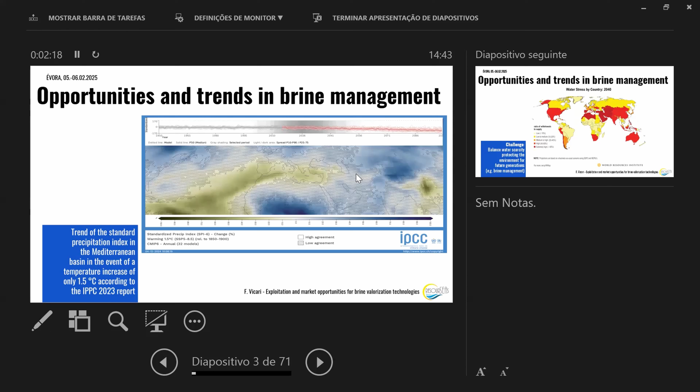This is the first challenge that all of us are facing nowadays: water scarcity. This is the official report of the IPCC, and these are the forecasts that we see for the standard precipitation index in the Mediterranean area. We can see how most of our regions are going to face dramatic reduction in precipitation, meaning that we need to find an alternative way to provide for our fresh water.

And this is even more clear in other extracts that we have from those studies that put the color red all over the Mediterranean area, meaning that we are going to face, in a quite long time frame, high or even extremely high reduction in water availability when compared to the withdrawals that we have, because of the increase of population, but also because the standards of hygiene and food requirements are going to grow while the availability is going to decrease.

So, the other way around, we can go for desalination. And we know that reverse osmosis is nowadays a standard in the desalination market, at least for what concerns seawater desalination. But we need also to start thinking in a sustainable way about brine disposal.

So for the time being, when it is done in a proper way, brine management is not an issue. When you do have proper diffusers, you measure the concentration across a straight line from the exiting jet, and you can assess that the concentration is reduced to that percentage, you're fine, you respect the limits, there's no problem. But we know that when we are in a limited geographical situation, such as the Mediterranean or even closed basins, that is going to alter the ecosystem. So we need to take this problem into account.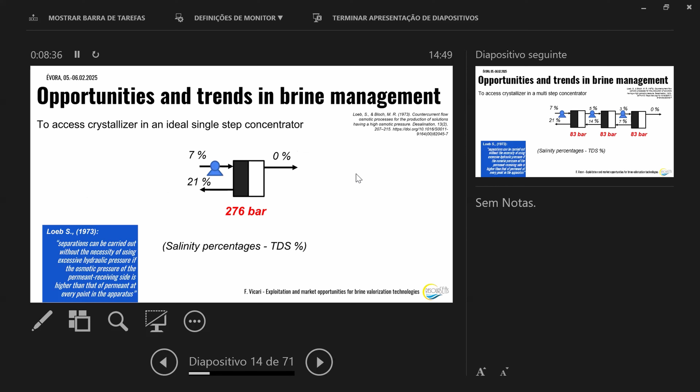So the concept of the osmotic cascade is very old. The first one to say it was Sidney Loeb. He said a lot of things. If you don't know Sidney Loeb, you shouldn't be here. But Sidney Loeb was a genius, and he invented many technologies that nowadays we are exploiting. He was the first with this concept of the osmotic cascade, and what he said was, okay, if you want to go from 7%, which is more or less the desalination brine, to the saturation of sodium chloride, you need to face 276 bar osmotic pressure if you want to do that in one step. But if you do that little by little, having a loop of recirculation of the brine for the following unit, then the single step will take you less.

And you can do that with reasonable means. This is what, a couple of years later, in 2019, Gradiant did. They also managed to get a patent on something which was already known. I don't know how they really did it, but it doesn't matter. What they did was bring this concept to the market. And this is one of the most urgent challenges that we need to face. Everything that we do needs to reach the market at some point, and this is what they did, exploiting an opportunity that was there.

So there was SAWACO, a leading provider for Saudi Arabia of freshwater by desalination, that had an installation in Jeddah that couldn't be enlarged by increasing the seawater feed capacity. There was this strict limitation. So the only way for them to increase water production for an increased population—we know these cities are seeing exponential growth for their people—was only to increase their recovery. They didn't have any other option.

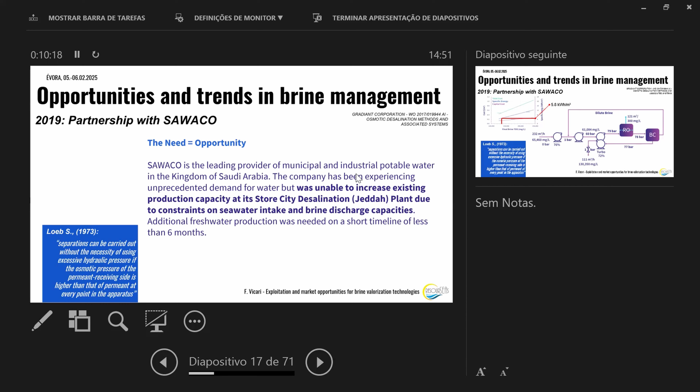So Gradiant went there and said, we can do that. And they did it, they increased the capacity. The plant is actually running at full speed capacity for 3 years now. This enabled the delivery of a very relevant impact. After this collaboration, many others came for Gradiant. And at the end, what happened after a couple of years is that Gradiant became the first and only unicorn in the water sector. Maybe this is something that you don't know.

What is a unicorn? It's a startup company that gets a 1 billion valuation, which is a very high value. Of course, after that, everybody starts calling Gradiant saying, hey, sell me something. And this is happening now. You can see on the web all the reviews about the performance. This is a very successful case study that we should take care of.

Another case study I want to discuss, which is closer to our Mediterranean basin, is the saltworks bittern case. This is a conventional saltwork. All of us have seen this kind of installation in our countries at least once in our life. What happens is that water enters the first basin, gets trapped, and then starts evaporating.

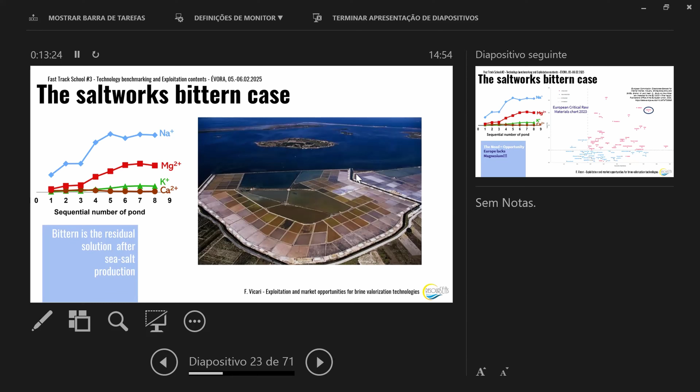So we started thinking about a way to respond to a need of the European Union, which is a way to produce magnesium. This is the list of critical raw materials, the current one, but it's true that when everything started it was more or less the same. Things change over time, but these are the minerals we require in Europe. So you have an opportunity, there is a need. Shall we make a business?

We started creating a first experimental apparatus for separating magnesium in the form of hydroxide, just by mixing things and seeing what happened. The problem was - this is a movie, not a picture - it should go down, but it doesn't. Because this is what happens when you mix something containing magnesium with something containing hydroxide: it stays there for decades.

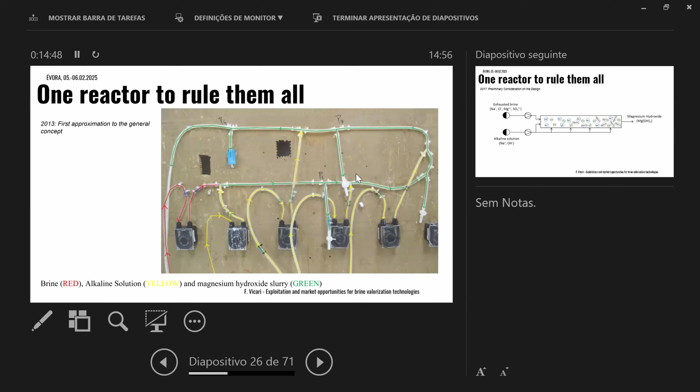So maybe we should control supersaturation in some way. Let's try putting some sodium hydroxide in little by little, in line, and see what happens if we do it very slowly. It didn't work enough, but that was already something.

Then the concept evolved. You've already seen this picture, because this work belongs to that research group. Finally, the definitive design came with the foundation of ResourSEAs. This is the core of the patent we have about this reactor, which improves crystallization by controlling local supersaturation of the system. It's already granted in Italy and under examination all over the world.

We've tried this reactor in many different projects. I'm showing its application in the Zero Brine project, because with this kind of control, you can think about separating the crystallization of the two divalent cations, magnesium and calcium, very finely. We had purity close to 98% in the first crystallization step - good purity, but you don't need so much purity afterwards for the separation of calcium too.

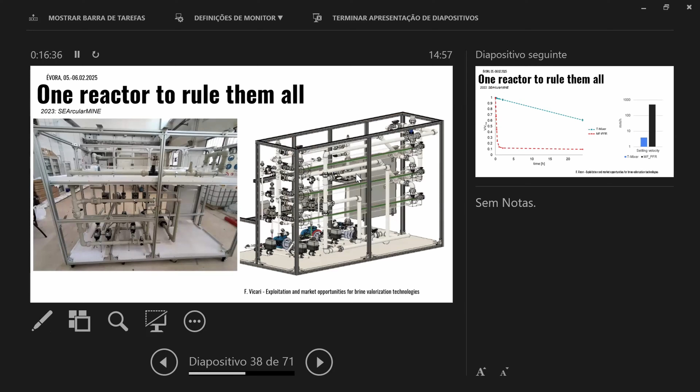That is the plant that was built and shipped to the Netherlands. And this is what happened a couple of years later in the SEArcularMINE project - you've already seen these pictures. We evolved the concept again, making it modular so you can arrange several vessels in the same space with small modifications. But the most important thing is that we finally managed to have something fast to separate.

If you compare this settling curve - two settling curves - the first represents conventional mixing with a T, where you inject the alkaline solution next to the solution containing magnesium, and you just observe what happens. The other is our reactor operating with the very same solution. On this logarithmic scale, while you have a few millimeters per hour in one case, you get 500, half a meter per hour, with our system. Now we can appreciate that it's actually moving down very fast.

One of the ways we did it is through a computational fluid dynamics study, and that is a sketch of the reactor during the design phase. You can see the vortex created by the flow and the propellers in the tube. But yesterday we went to the saltwork installation where we provided that reactor, and you can see that sometimes computational fluid dynamics gets close to reality.

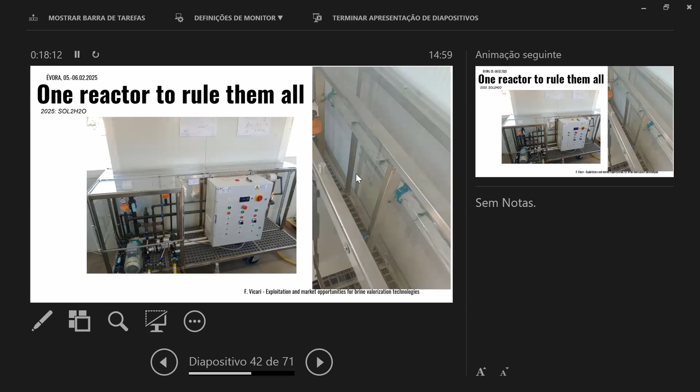Okay, so the reactor itself is part of many different applications. You can protect a product as the reactor, but you could also protect a process where the product is used. One of these processes is for the extraction of minerals from bitterns, which is the core of the SEArcularMINE method, a fully integrated scheme for the recovery of minerals from bitterns. It also entangles the possibility of combined desalination, the production of sea salt, magnesium in the form of hydroxide, lithium, and other elements belonging to the list of critical raw materials.

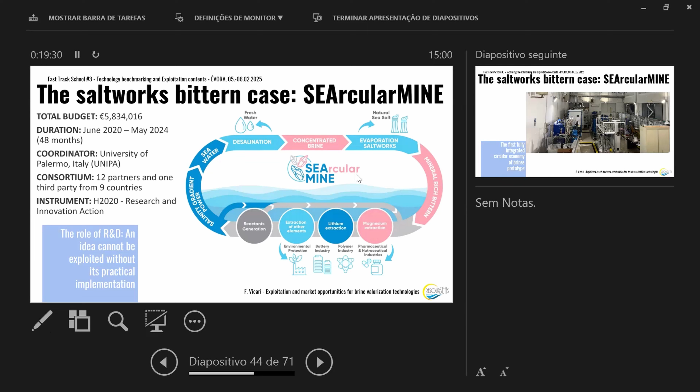This project was a great success, coordinated by the University of Palermo. Professor Cipollina was the coordinator there. We evolved the knowledge of all these points so far from the beginning. But the most important success, for me at least, was the construction of the first fully integrated circular economy of brines pilot plant in the world. So this was the first one.

A couple of months later, we had the Mazda project, the Maven project, another project that could claim similar success. But this was the first one, operating with real solutions.

Usually I also put a video at this point, but since the presentation was long enough, we go directly to the conclusion. Now the plant was moved next to the saltworks. Paula knows that place very well, because the objective is to switch from the prototype of the SEArcularMINE project to a real industrial plant.

We also created a new company, Maremag, whose only objective is to produce and sell minerals. This company is the core of another project, the Maremag Life project, which started in September 2024, last year, and is now trying to accomplish this TRL step forward from the prototype to a proper industrial plant.

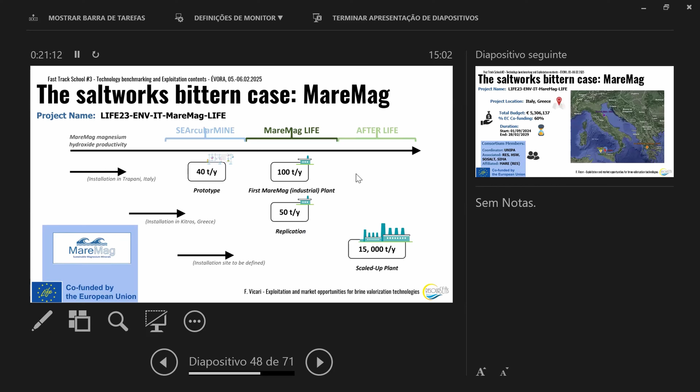And we look forward to see if after the MareMag Life, we can go to a great scale up. So the MareMag Life project, again coordinated by the University of Palermo, has as participants important pieces of the puzzle, such as SOSALT, who's the owner of the bittern of the saltworks, and CIMA.

CIMA is the owner of the need. So we have put together in the same project who has the resources, who has the technology, who has the need. The need for magnesium hydroxide, because they produce flame retardants for the cable industry. So they give us constant feedback in order to see if we are on the right path to produce what it is needed by the market. So we are switching from the big overview of Europe needing magnesium to the small view of this company needing this magnesium in this way.

So the business of the company that we have created is exactly to respond to this need. But then, apart from the direct exploitation of this intellectual property, we aim also to perform some trials for indirect exploitation. So we want to see if this model is exportable.

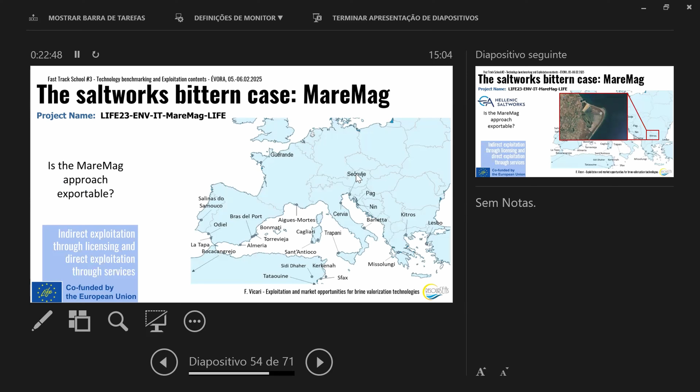So in the project, we also have Hellenic Saltworks, which is the owner of many different saltworks in Greece. But one of these saltworks, the one of Kitros, is another opportunity because it is a very old, low technology level with an industrial context which makes it not prone to tourism as the rest of the country. So Hellenic Saltworks wants to renew this place, make it modern, and try to get it upgraded in order to have also the production of magnesium hydroxide there.

We have seen that there are many challenges still open for the brine mining sector, and I've shown the path for facing one of those challenges, which was a very long and complicated challenge for producing magnesium hydroxide. And then one of the things we would like to show in the future is how we face the challenge of replicating something we have seen in one place in another place with the MareMag Life project. And thank you so much.